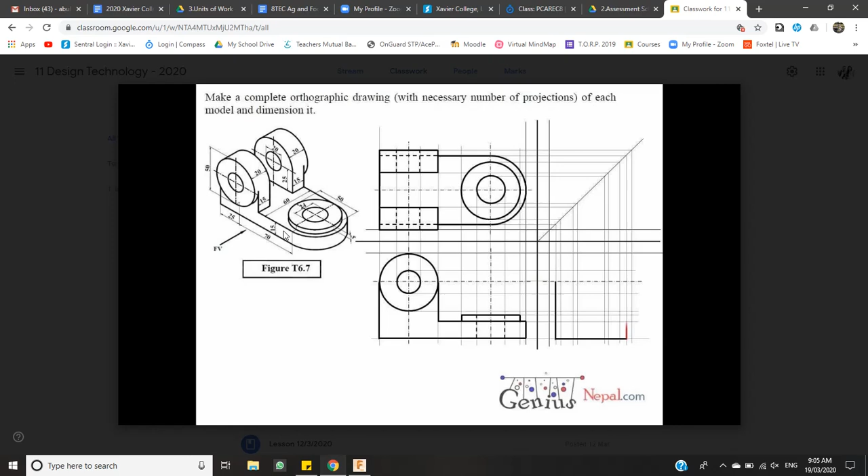So come to Fusion, create a new sketch. It's going to be a base view. Get my rectangle tool. It's going to be 60 tab 125. So you can see I've put the measurements in there. Okay, now we're good to go. So when I look at this object, the first thing I'm going to do is give it its extrusion to make it a platform. So that's a 15 millimeter extrusion. So I come across again, always working with solids, extrude, 15. Okay, so I've got my base shape there to work with.

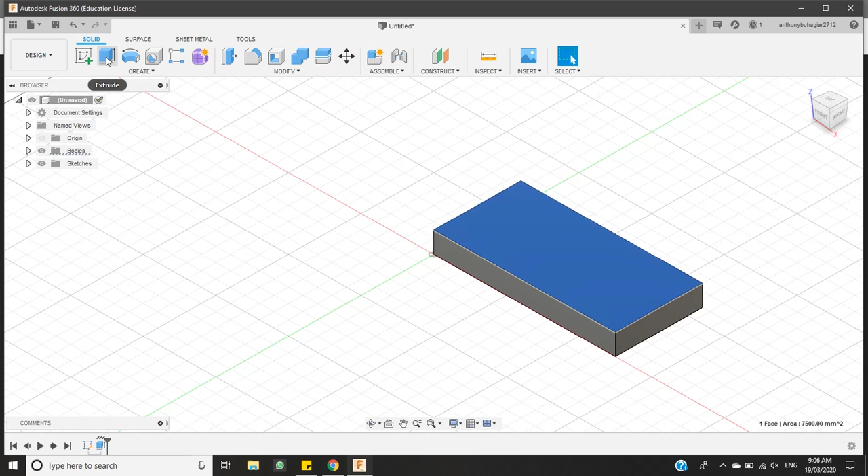And then what I'm going to do straight away is actually add this circular part here. So if I look at it here, this larger circle has a diameter of 50, this smaller circle has a diameter of 24, okay, and I also know that there is a 5 millimeter gap inwards to this point here. So if I have 25 for my radius here plus 5, it means I'm bringing the center point in 30 millimeters from the end. So I'm going to create a new sketch, line, find the middle where it has a triangle, bring it in 30.

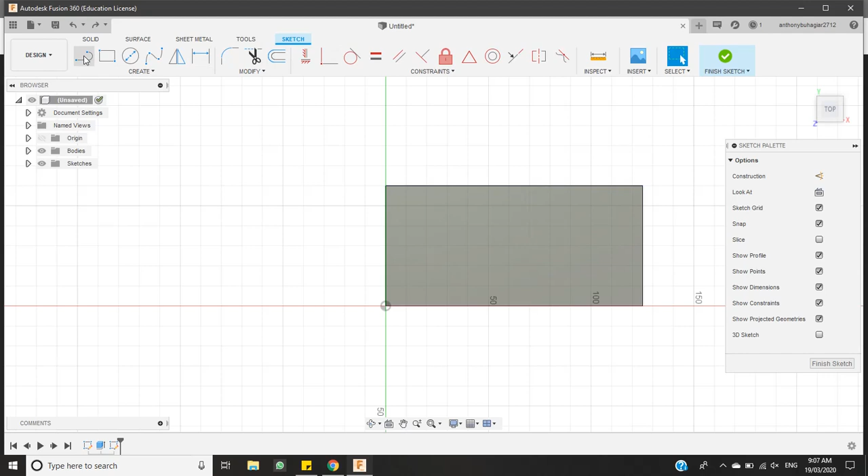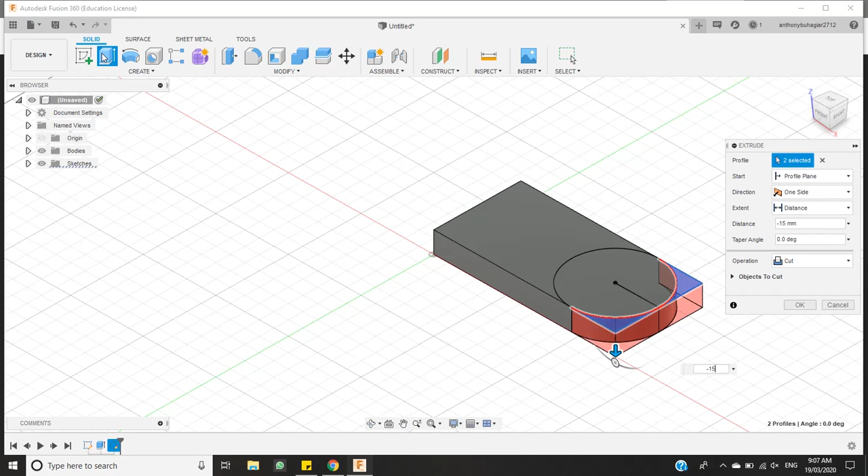I'm going to draw two lines straight away. What I should actually do before I do that is actually draw the curve here. So if I've got a diameter of 60, I'm going to bring it in 30 straight away. Draw my circle, and the first thing I should do actually is get rid of this. So I'm going to do a solid, I'm going to do a negative extrusion to get rid of that, and now I've got this shape here.

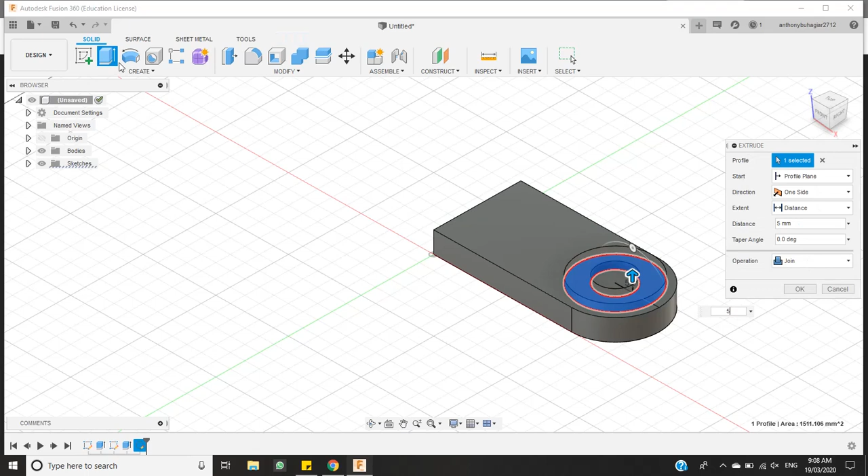And once I've done that, then I'm going to do a new sketch. I'm going to bring it in 30 again. Like I said, the larger circle we were working with had a diameter of 50, so I'll do that. The second one had a diameter of 24, so I'll do that. And then obviously when I look at it, I'm putting a hole through the bottom and I'm raising it up 5 millimeters as well. So what I'm going to do first, I'll do solid, extrude, bring it up 5, press enter, then I'll select this face here, extrude, negative 15, and there we go, we've got that shape there now.

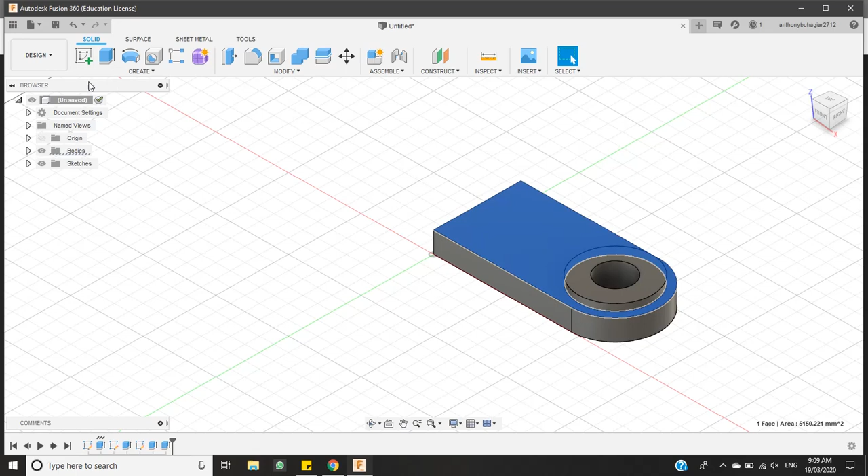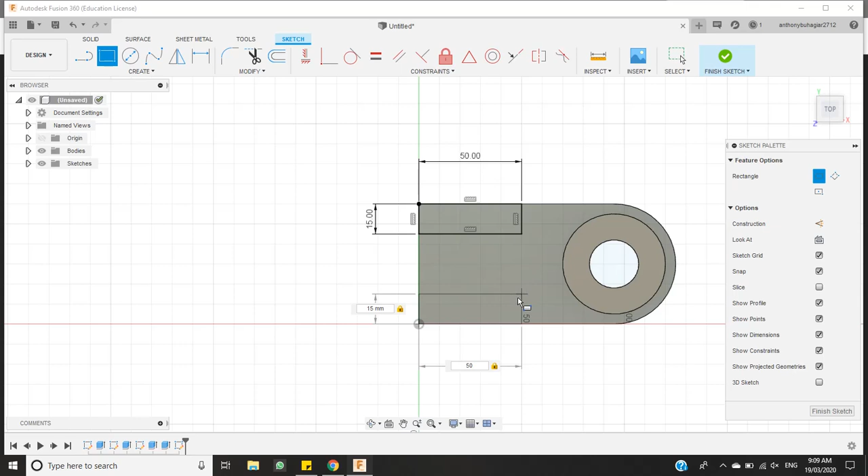Once I've done that, I want to build up these two side parts here. So the first thing I can see is that I've got a diameter of 50 that I'm working with, so that means I need to raise up that section 50 millimeters. Okay, and then obviously it's got a width of 15 as well. So I'm going to do a 15 by 50. So create a new sketch here. So I'm going to do this twice. 15, tab 50. Okay, I'll do it again here. 15, tab 50. Press enter.

Now I need to do an extrusion on both of these, and we're going up 50 as well, like so. And the next thing I want to do is actually round the edges on both of these. So I'm going to create a new sketch, and then I'm going to round the edges. So I know that it's got a diameter of 50. I've done that now. So I'm going to highlight both of these.

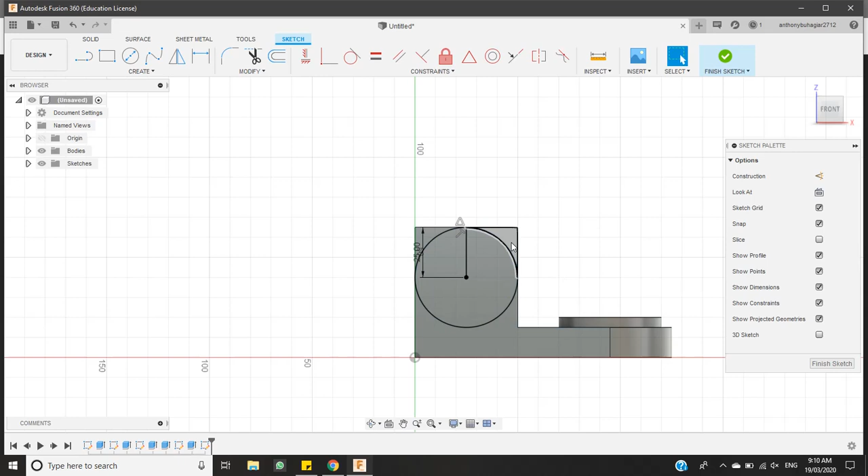Let's try that again. Highlight both of them, and I'm going to do an extrusion. -60. So I've done the circle right now, and now all I need to do is actually do the, I'll show you, these circular parts on the outside.

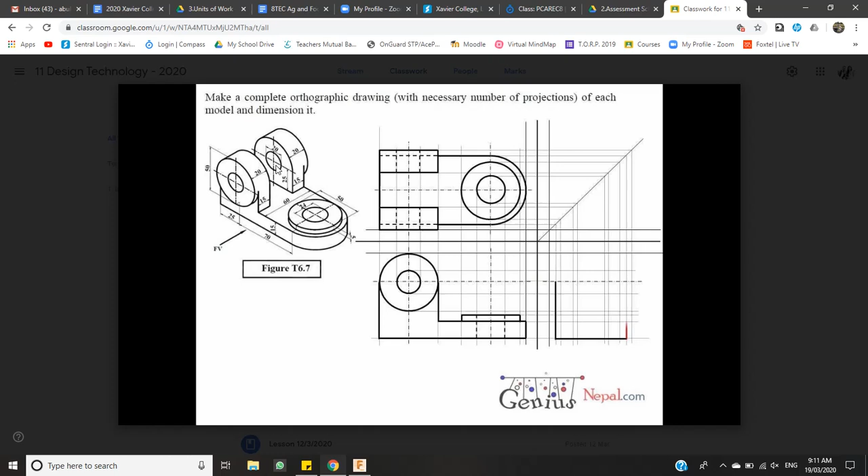So we've got those circles. We want to bring them out another 5 millimeters, so they actually overhang the edge by 5 millimeters, and then we need to push a hole through them as well. So we'll do the 5 millimeters first. So the larger part's 50, the smaller diameter is 20. Fairly straightforward. New sketch.

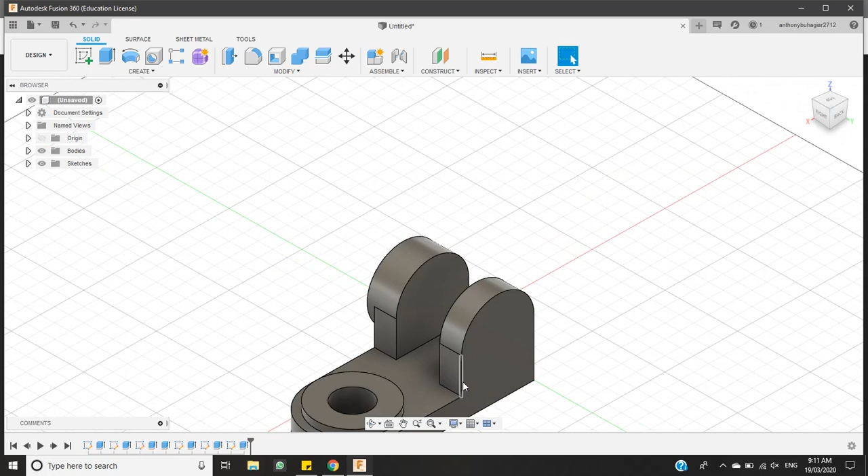So we'll start by doing that. Solid, extrude, 5 millimeters. Press enter. Then I'll do the same thing over here. New sketch. Use the circle tool. Find the middle. Extrude it out 50 to another 5 millimeter extrusion.

So we've got that. And then the last thing that we need to do is to actually put a hole through it. So another sketch. Find the midpoint, 20, and then we can use that to do our final extrusion. So if I look at it, I'm going to go -60. No, actually I need to go -70 because we've added another 10 millimeters to it.

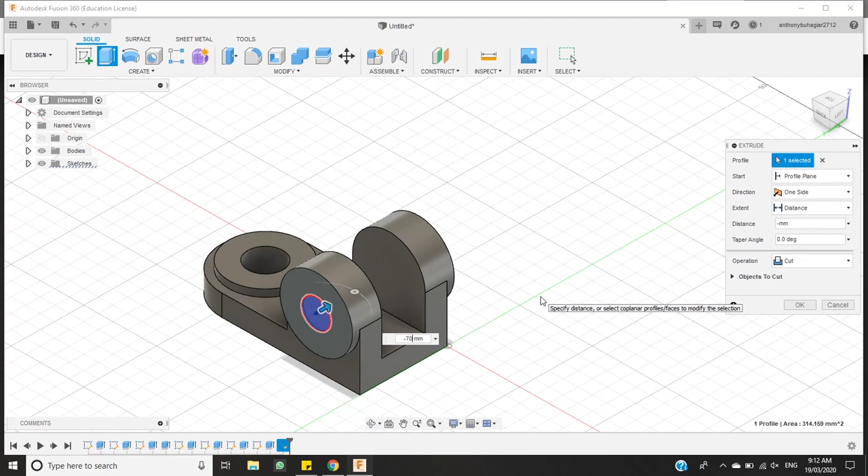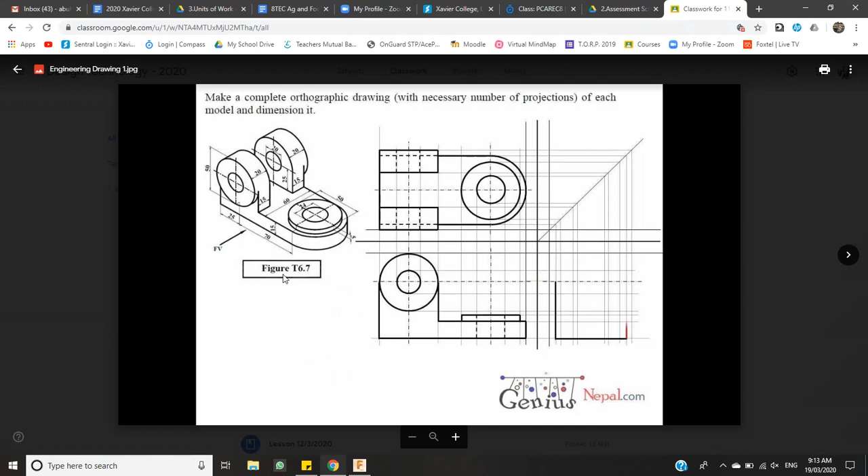And there we have that final shape. And if we put it in free orbit, that's exactly what we're looking for. Alright, so that's our first object that we needed to do, figure T6.7. We'll move on to the second one now, slightly more difficult.

So the other thing I'm going to do is, because it's got such an intricate design on each side, I'm actually going to build it in half and then mirror it at the end so that I can build the second half of it. So the basic size that I'm working with for this project is obviously going to be 120 millimeters off the ground, and then it comes in 25 to the midpoint of that circle. So if I do 125 plus 40, it gives me 165. So 165 by 120 in the side view.

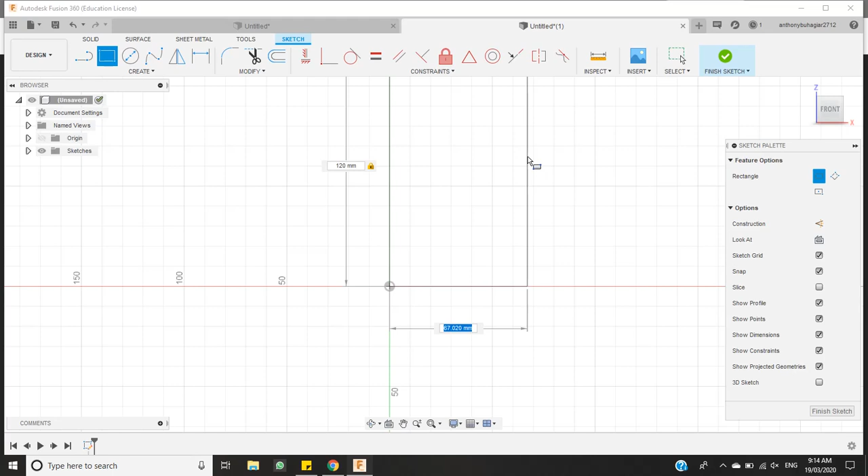Let's try that. So 120, tab, 165. Okay, so this is the basic shape that we're working with. Now what I'm going to start doing is just start drawing components. So first thing I'm going to draw is this 65 by 18 base.

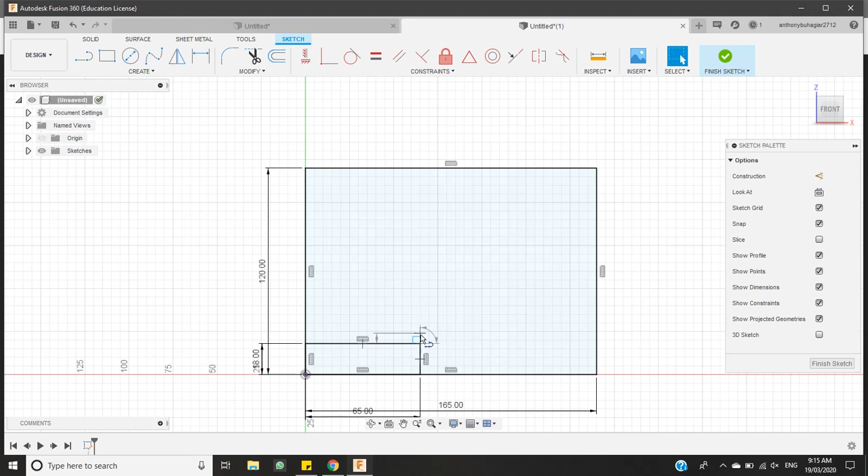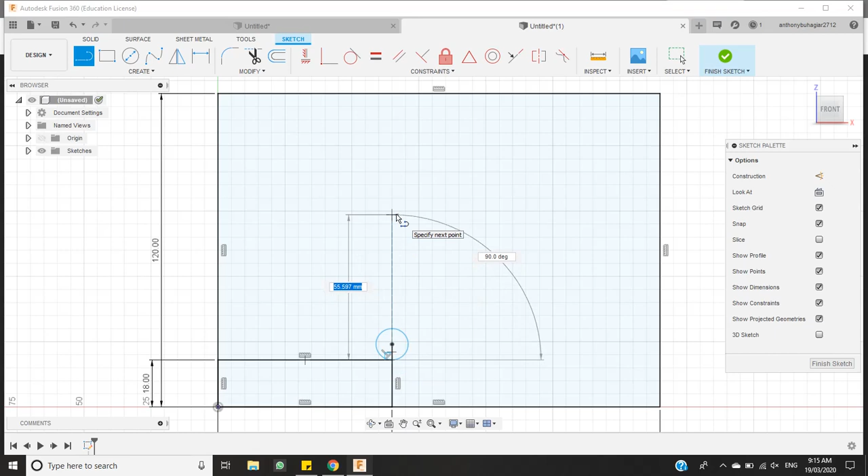Now, the next thing that we need to draw is this big radius of 18. And it is coming up 53 millimeters from this point here. So what I'm going to do straight away is draw a line straight up 53, and actually I'll make it a construction line so I don't need to delete it. So this gives me some height to work with.

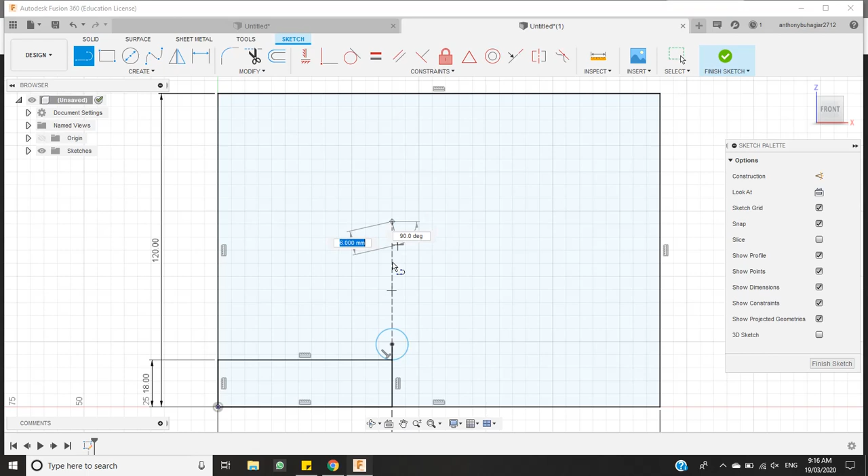Then the next thing we need to do is this radius of 18 needs to somehow line up with this radius of 6. So the first thing I'm going to do is, if it's got a radius of 18, I want to know in this line here how low my center point is going to be. So if I just put a line there measured to 18, I've got this point here that tells me where the radius is going to be. Then all I'm going to do is bring a line in 18 millimeters again.

Okay. And now I know where my circle is going to start from. So I'm going to turn that into a construction line. I'm going to turn this into a construction line as well. And I can use that. That's actually not correct. Let me back up a second. So let's follow the same process, but this time what I'll do is I'll draw the 53.

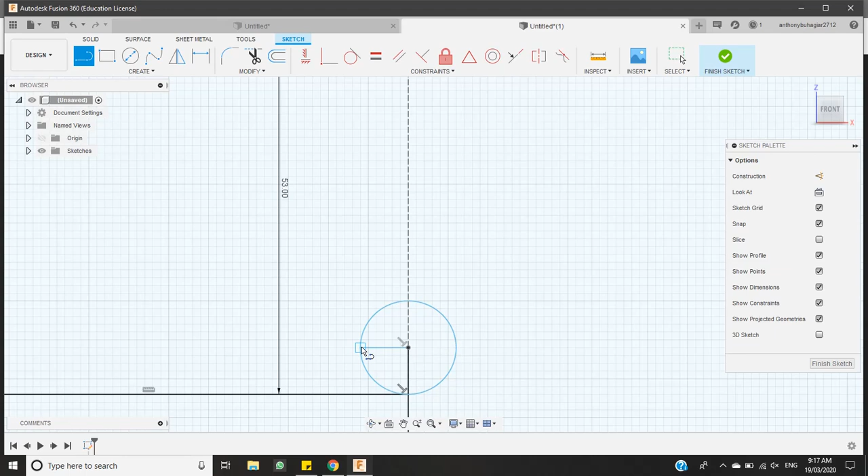So this is the widest part of my circle. Okay, it's got a radius of 6. If I'm coming from there, I'm drawing a line up. I'm going to do 53, bring it up to the same point. 53 minus 6 gives me 47, so I know that's correct.

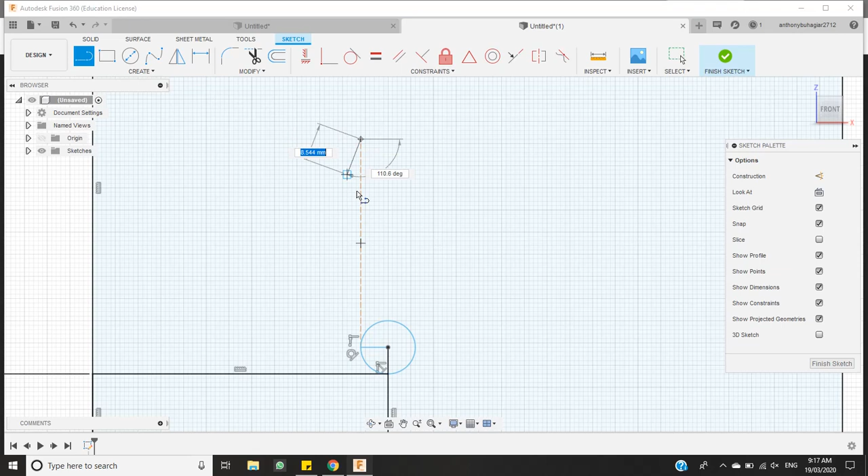Now that I've got that, let me delete this line. Let me delete this line. Turn this line into a construction line. I'm going to draw a line straight down of 18. I'm going to draw a line across of 18. Okay. Turn both of these into construction lines.

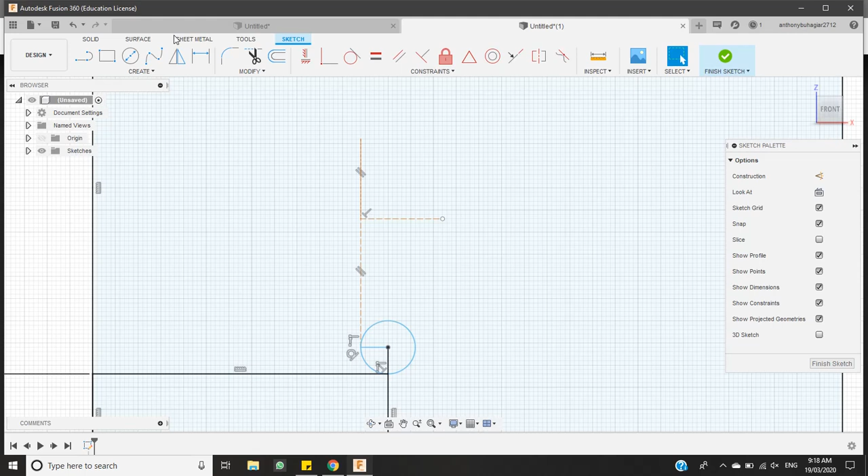Because all I want to do with both of those lines is get a bearing for where this larger circle needs to begin. Now the reason for that is because if we look back at our drawing, this small radius and this large radius need to line up in a straight line. Okay, so I've done that. That is good. So now I can get my pencil tool, draw a line from here to there, and that works. So as you can see, we've got that kind of shape there.

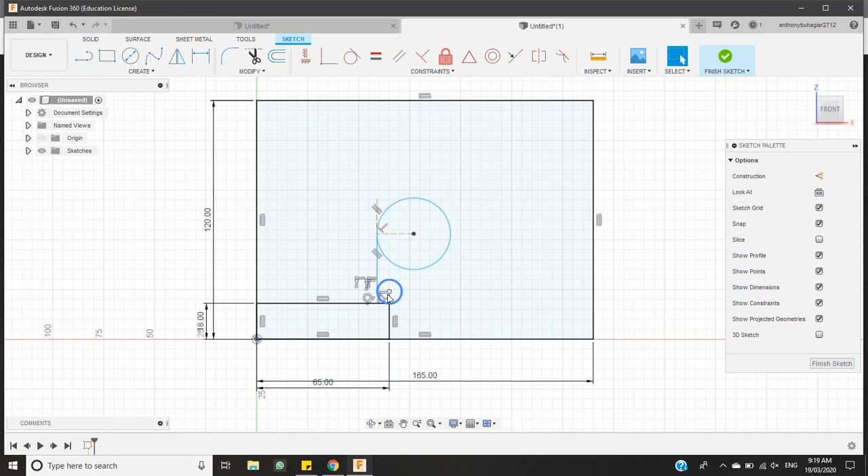The next thing that we need to do is draw this other shape here that is 12 mil thicker all the way around than this first one. So the way that we're going to do that is by using these same center points for our circles, and all I'm going to do is draw a line across 12 mil there, and draw a line across from here so that it's 12 mil as well.

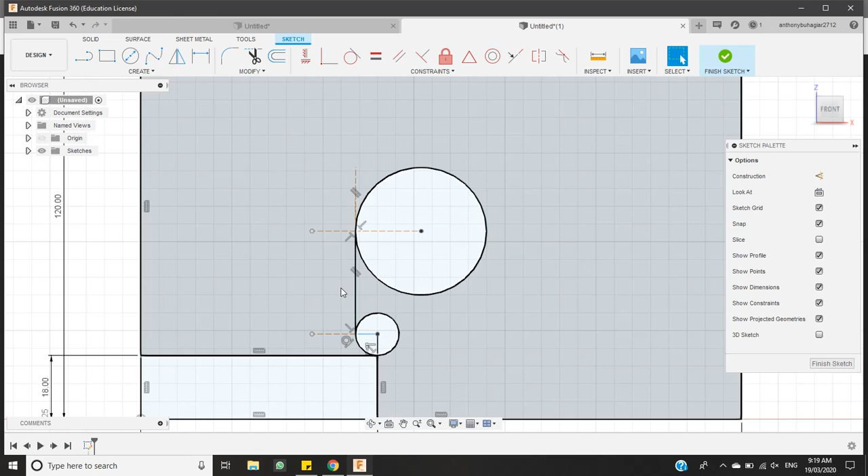Okay, again we're going to use these as construction lines, and what you're actually going to start seeing is that there's going to be a lot of circles and lines and shapes on this drawing that you need to keep there till we do our final selection for extrusion. So again, from the center point, I'm drawing a circle right out, but now I know that there's a curve that is 12 millimeters wider than on the other side.

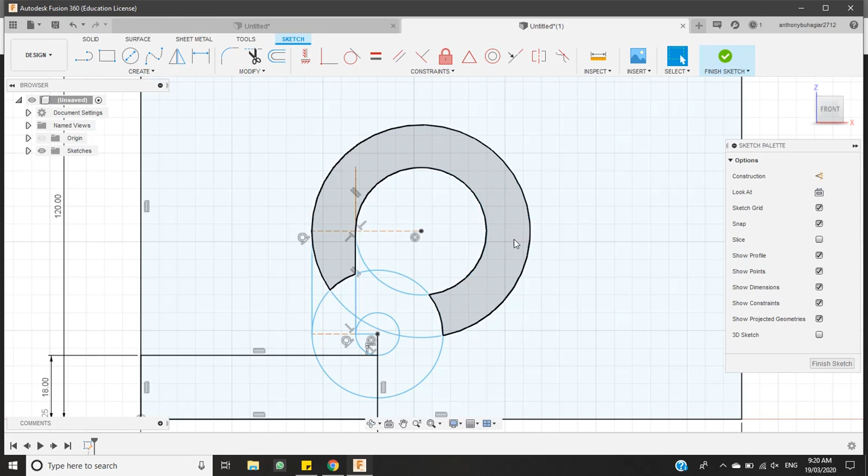So I press escape, and then I can use this to produce that shape that I require. So what I can see now is I've got this shape here, okay, and then I've got this curve, all these little parts that I'll add together to produce the shape that I require. Now that we've done that, we need to continue building on from here.

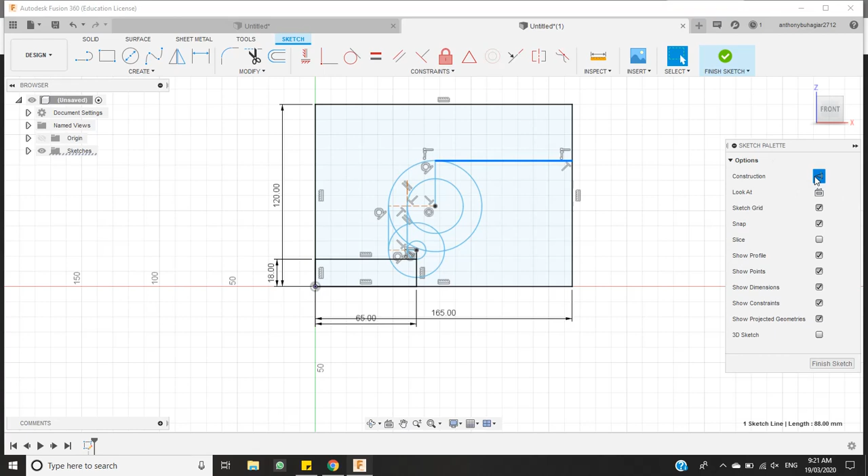So we've done this curve. Now we've made it so that it keeps curving around. Now we need to straighten it off, and we need to know where it ends. And we find out that it ends halfway at 125 millimeters across. So what we're going to do from here is I'm going to draw a line firstly to the top of this circle here. Now if I draw it all the way across here, what I can then do, turn it into a construction line again, both of them, so they're not interfering.

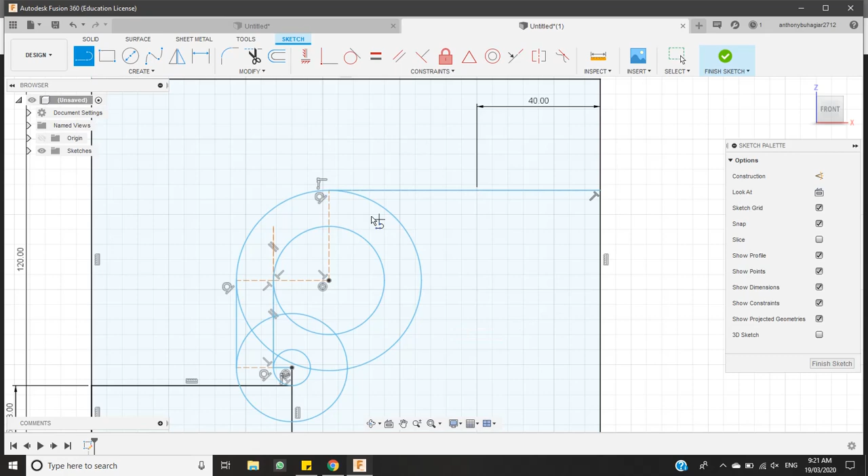But now I'm going to draw another line across, so we know that this is 165. We want to minus 40, so that it becomes 125. So now I know that if I zoom in, this is where that section of the drawing should end. Now it's frozen a little bit, but did that work? Let me try that again. Okay, we've got that there.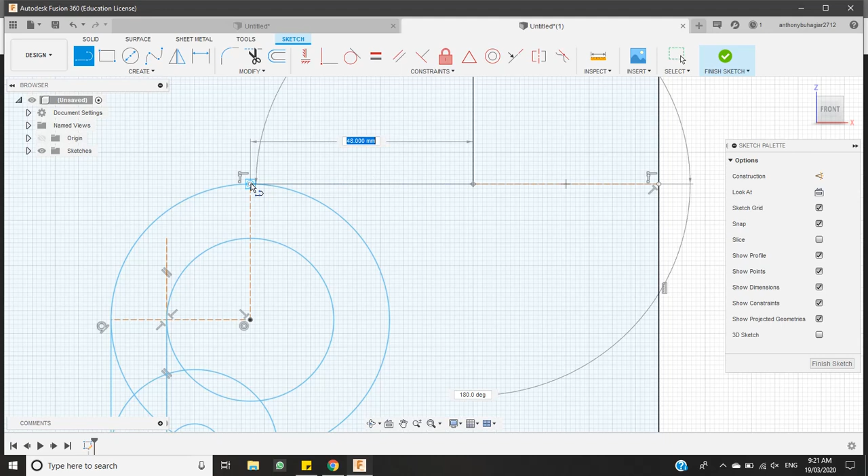So let me just delete that first. So now we can see it. I'll delete that too. No, I won't. Control Z. Turn that into construction. And this becomes our actual drawing there. I'll do the same thing over here. Now we've got that shape that we need to work with.

And the next thing we're going to do is we need to draw, obviously, this big shape over here. Now, obviously at the bottom here, we've got this cylinder. What I'm going to do for now is I'm just going to leave it because I don't really want to worry about that right now. I'm just going to draw this part upwards from here. So this circle comes in 80 millimeters. So the next thing that I'm going to do, I'm going to bring a line in 80 millimeters. I'm going to drop it down, and for now I'm going to leave that as it is.

Now the last thing that I want to do before I do an extrusion is this spine that's over here. Now it seems quite easy, but once we do these two curves, it'll make it a lot easier for us. But we've got to get through a 12 millimeter radius and a 42 millimeter radius. So let's do the 12 mil radius first. So obviously it comes up to the top here. All I'm going to do is bring the line in 12 mil.

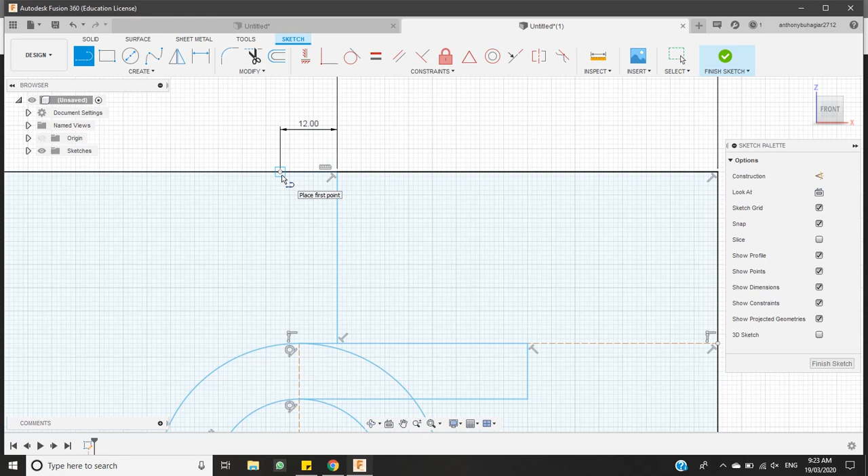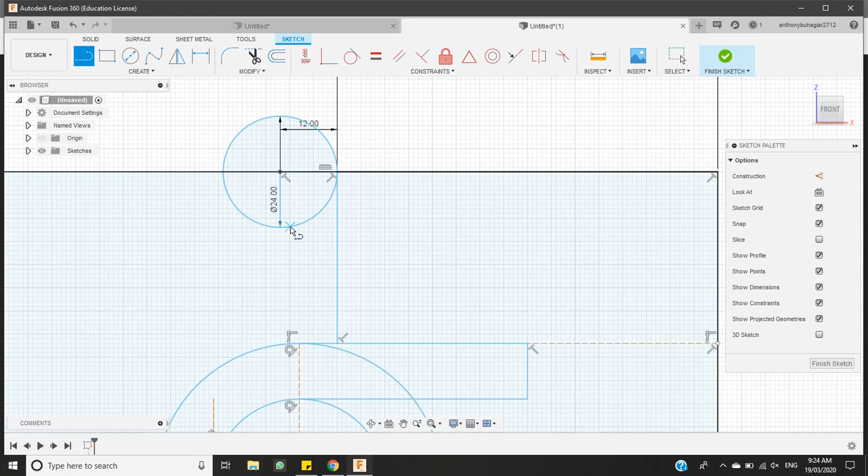Now what do I want to do? So I want the curve to be the bottom part of a circle. So what I'm actually going to do, I want my circle to sit on this point here, because I want to get that... what I need is actually this part of the curve right there. So I'm going to use that part of the curve as I require. I'm going to draw a line straight down here just to get the right intersecting point now.

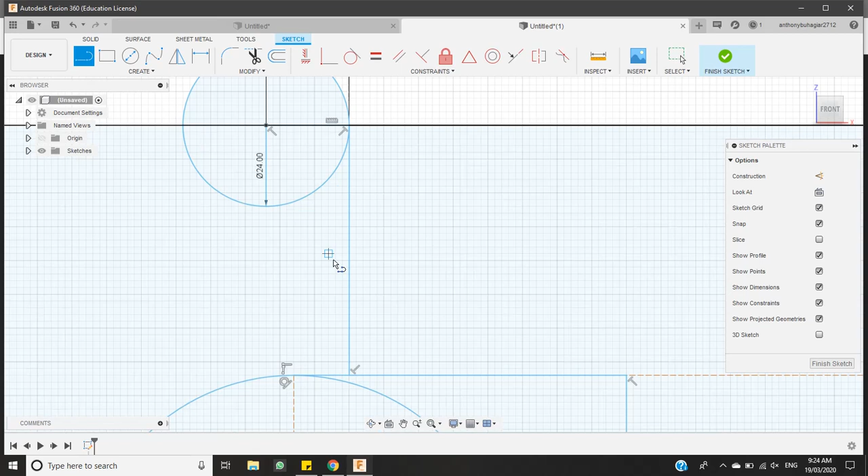So I've got this part done. Let's just have a look at our drawing again. Now we need to produce this second part of the curve, and what we also need to now think about is where they intersect. So from this same point, I now need to have a radius of 42. So I'm just going to draw another line straight down. That's going to be 24.

That wasn't what I wanted. Let's draw a line straight down from this point here. Sorry, 42 times 2 is 84. Now this is quite a big line. So first thing I'm going to do is turn that into a construction line. Get rid of the measurement just to clear out my drawing. And now I need to draw a circle all the way up to that point there.

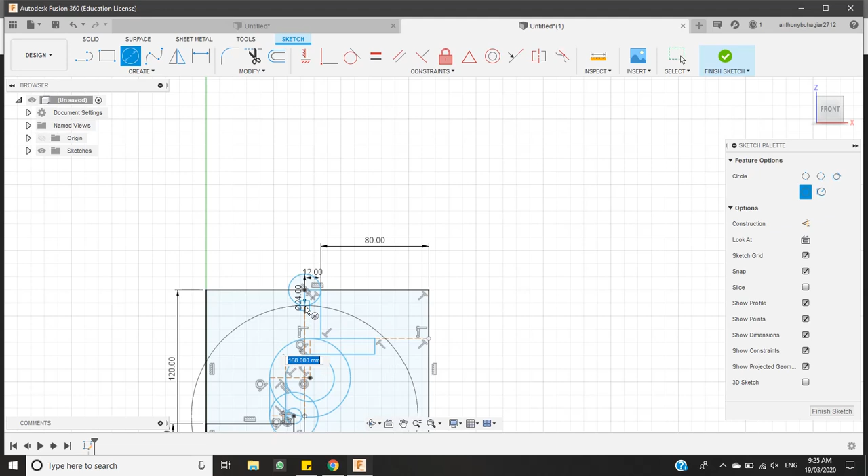That's taking a little bit of time to load. It's alright. Okay.

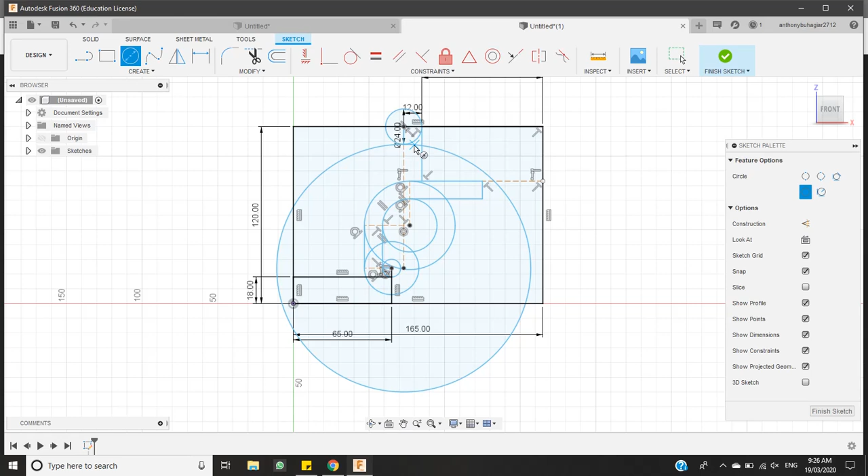Now, as you can see, we've now got this curved shape here, but we can't use that completely because we need to turn it into a straight line. So if you have a look here, we've got a measurement here of 24, and then at that point, when we come across, this curve ends. So what we're going to do now is we're going to measure down from this point, draw a line down 24, and we see where that ends, and then we need to draw a line straight across so that it intersects with our circle.

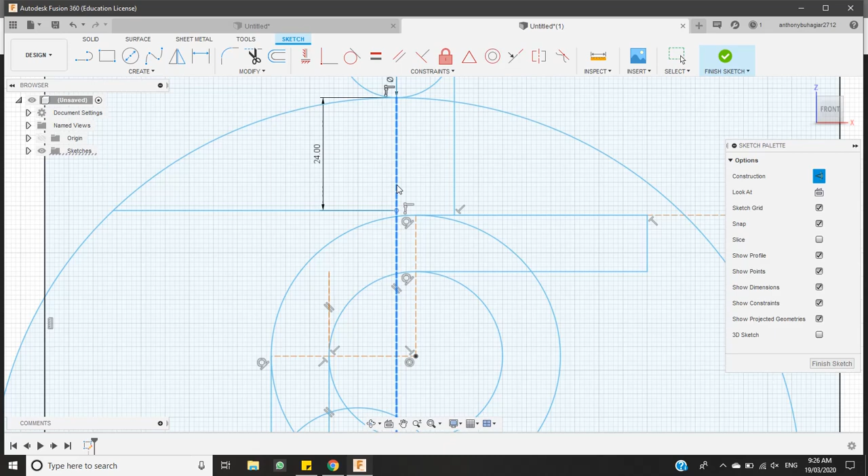Okay, now I'm going to delete that line. I'll delete that line too. But now we've got an intersecting point here. For some reason that doesn't look right. A radius of 42. Just bear with me for a second, guys. A radius of 12. That's a radius of 12, which means that's going to be 24. That's a radius of 12. It's a radius of 84. That is correct.

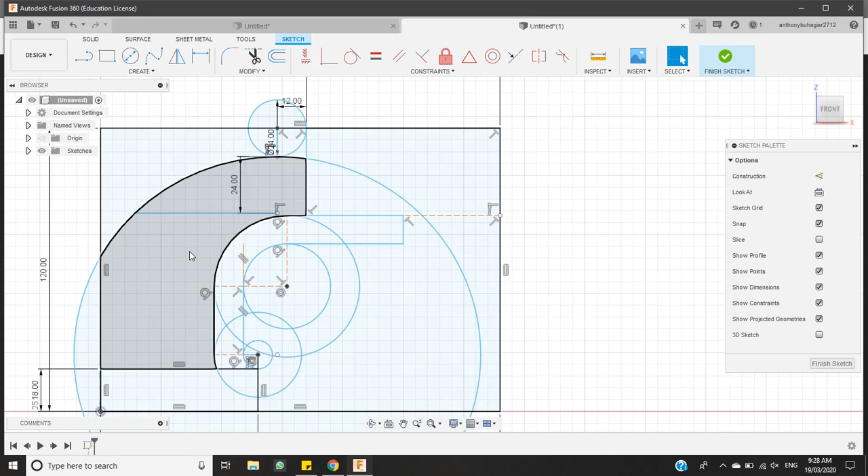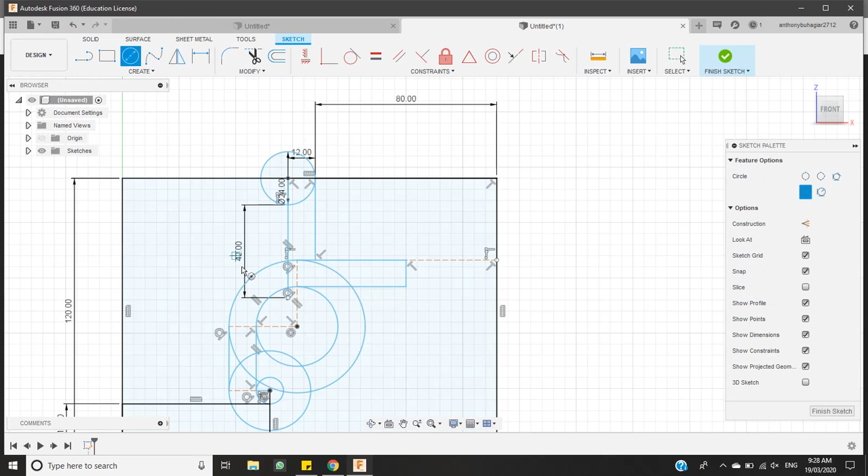Because this circle's too big. Just bear with me, guys. Let me try that again. Let me get rid of that. I want this circle to have a 42. Let's draw a radius of 42. Let's try that again. Okay. Create our circle. Done. Now loads.

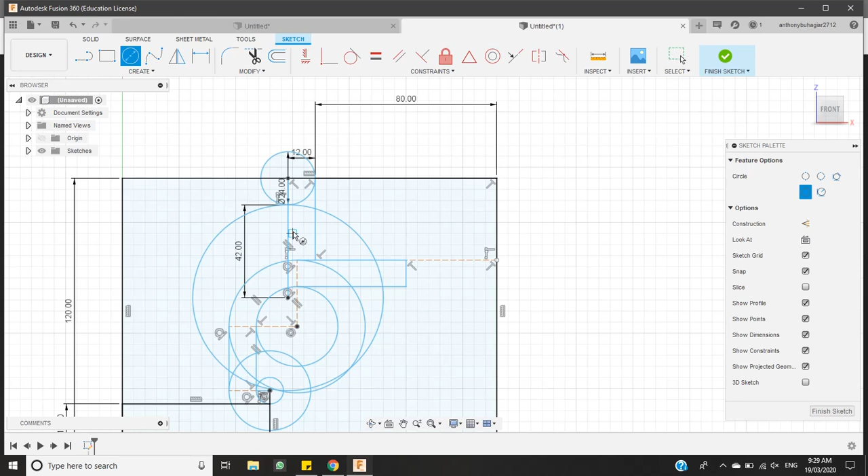Like I said before, let's draw a line down now, 24, and like I said, you're just going to see that this thing is going to have so many lines that you've somehow got to keep control of it yourself. So you just got to be very aware of what you're doing. Now again, the reason why I draw that line across, because that's our measurement there, and then from this point here we draw a line straight across like that.

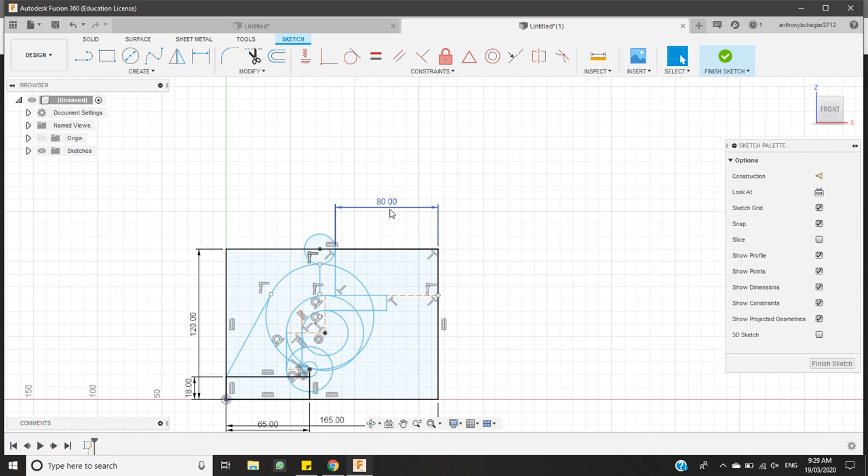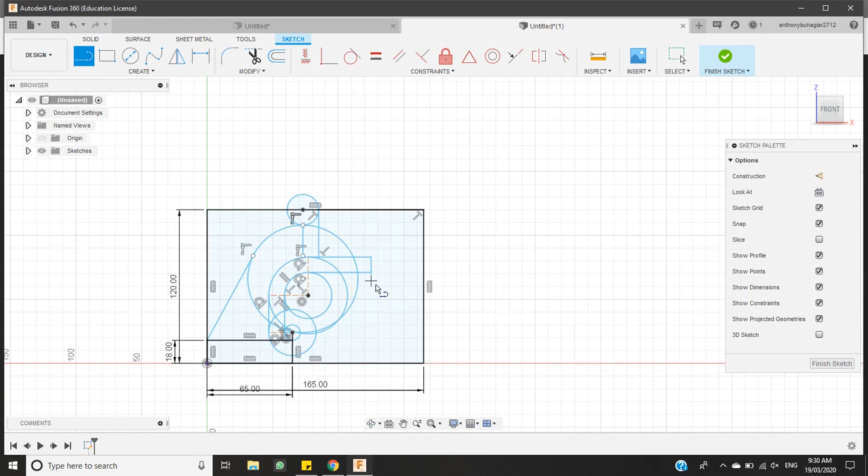Now there's obviously some lines and measurements that we can delete to clear up our drawing, but not a whole lot. You need to be careful because some of the lines you need for our extrusion, so be careful not to delete any of the circles or things like that. The last thing that we need to do is, even though it's got this part at the bottom here, I'm just going to build this cylinder at first from the top there and then add on to that afterwards. So I'm just going to draw a line straight across from here.

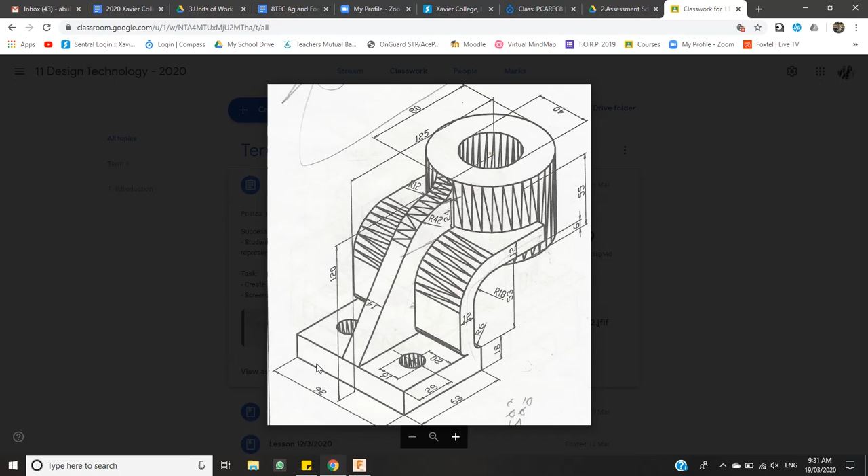Now when I do my extrusion, what I'm actually going to do is I'm going to extrude from the middle. So I'm going to do a 7mm extrusion of this shape here, and then I'm going to do a much larger extrusion, so 92 divided by 2, a 46mm extrusion of the front part. So how we do that, I select all of these parts from the spine like that. I then do solid, extrude 7, I press enter.

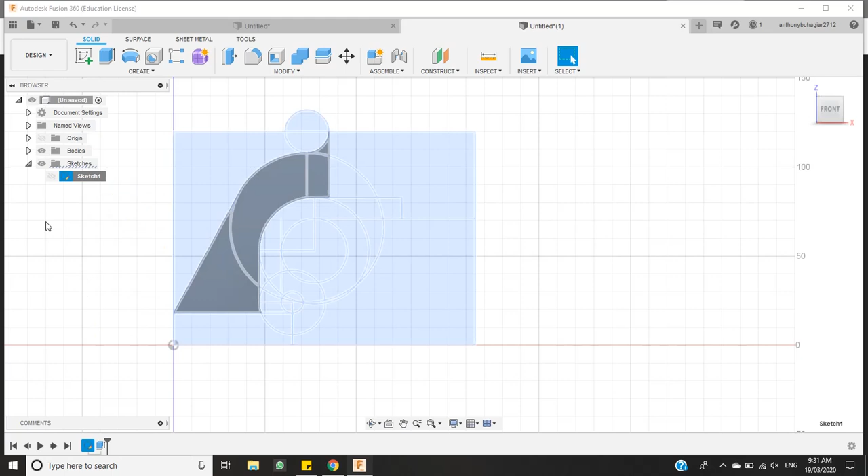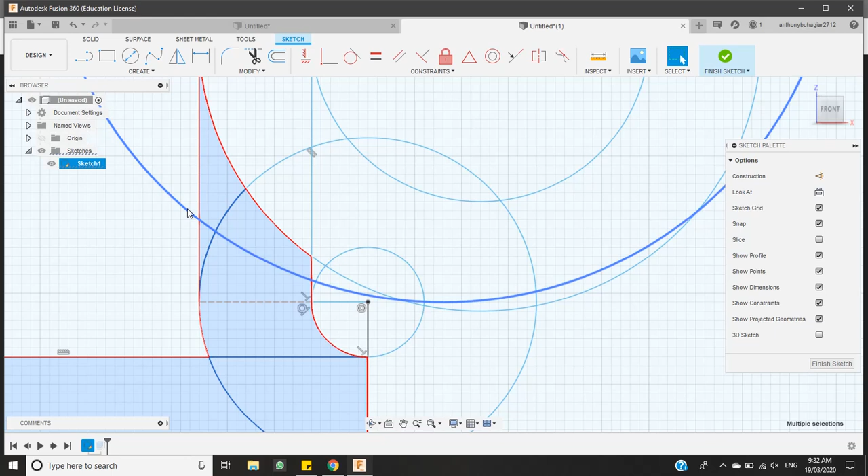Now it looks like everything's gone, but if I come back to sketches, come back to my initial sketch, what you should be able to do is actually edit it again. Edit that sketch. So now I've already selected this part here. Now what I'm going to do is select these other components. Now just be careful with what you're selecting. You want to make sure that you're selecting all of these components. And when I just look at the drawing again, yep, I've got all of that.

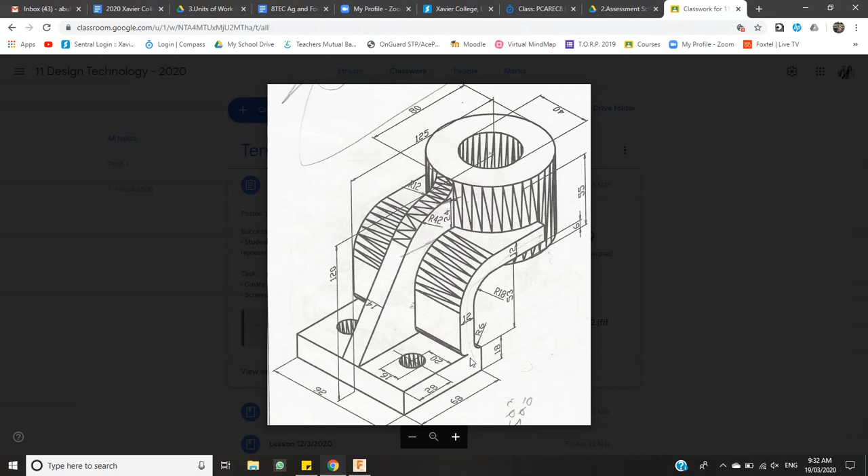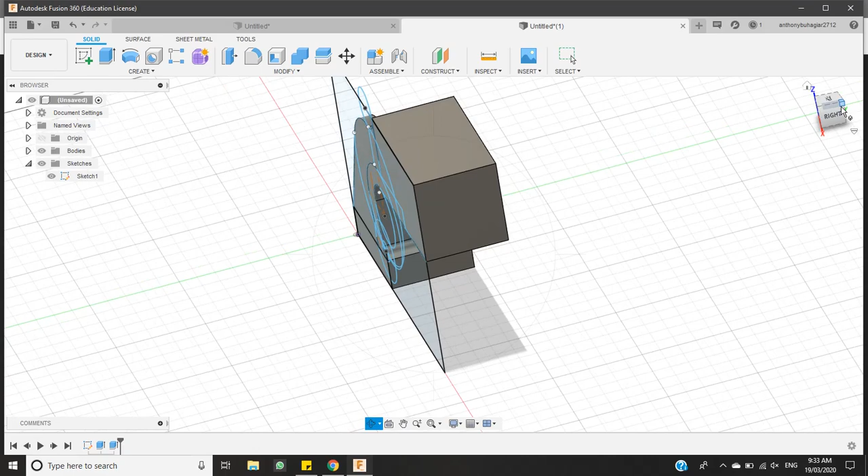And also what I need to select is this over here too. So I'm going to select this cylinder, this shape here. And we're going to extrude that 92 divided by 2, which is 46. Solid, extrude 46. Press enter. So what you can see now is that we've got this spine shape that we can now work with.

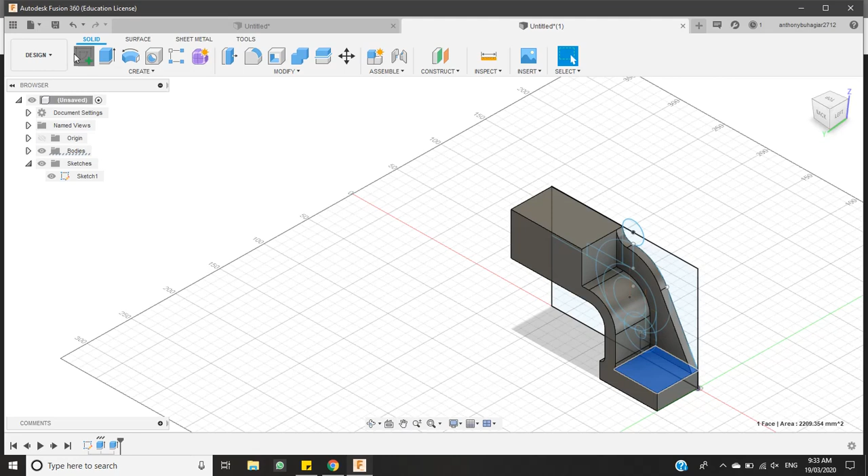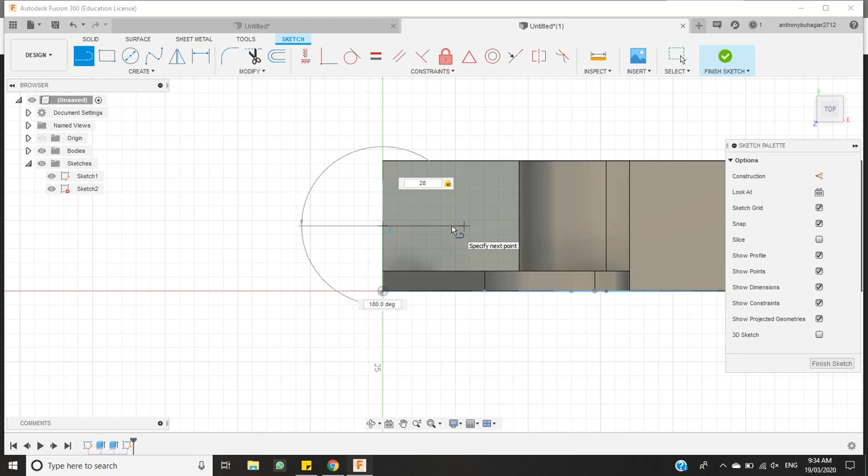So the first thing I'm going to do, if I look at this drawing here, is I'm going to draw this circle in the middle. So I know that it's 28 from the outside, 20 in from the wall, and it's a 16mm diameter. So let's do a new sketch. Just looking at it again, 28 from the back, 20 in from the wall. So 20, enter. Sure it was that. Yep. 28 from the back.

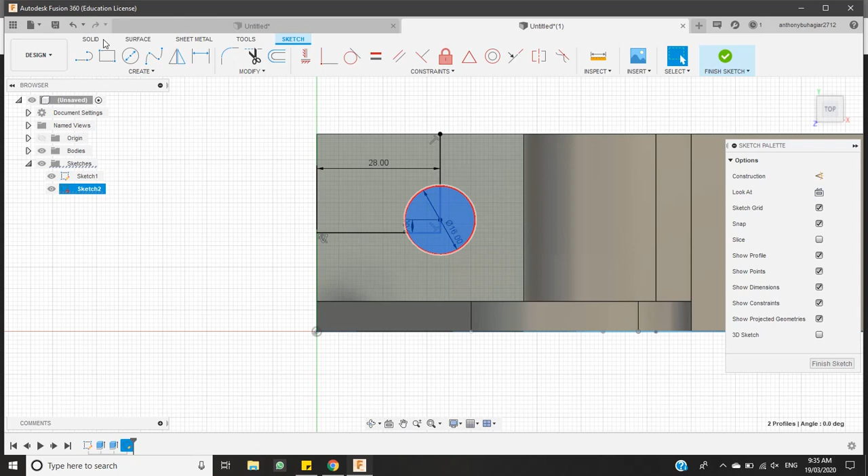So that's 23, so I need to bring it in 3 millimeters. Now I've got the location I need, and it's a 16 millimeter diameter. Press enter, and then control, let's do a negative extrusion. It's going to be minus - how thick was the base? Base was 18, so go minus 18.

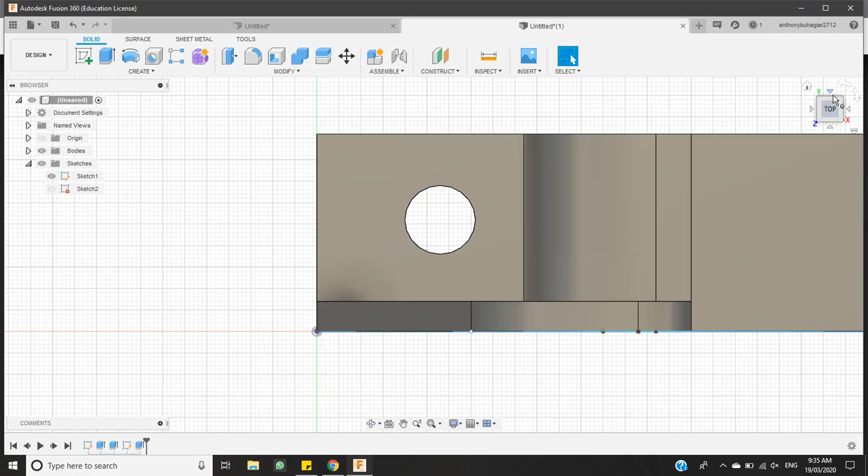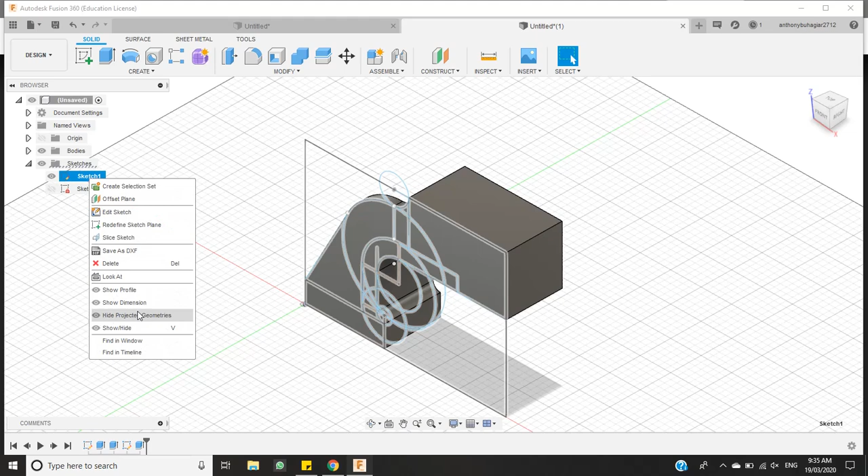Now it's got a hole in it, so we know that it's being done correctly. So, how can I hide this sketch? There we go.

So now, for me, the last thing we need to do is actually produce this semicircle. So I'm going to select the top face, and I want to draw onto it. We're drawing a cylinder that has a diameter of 80. So straight away we know where it begins. So I want to go find the midpoint. I'm going to draw a construction line all the way across it.

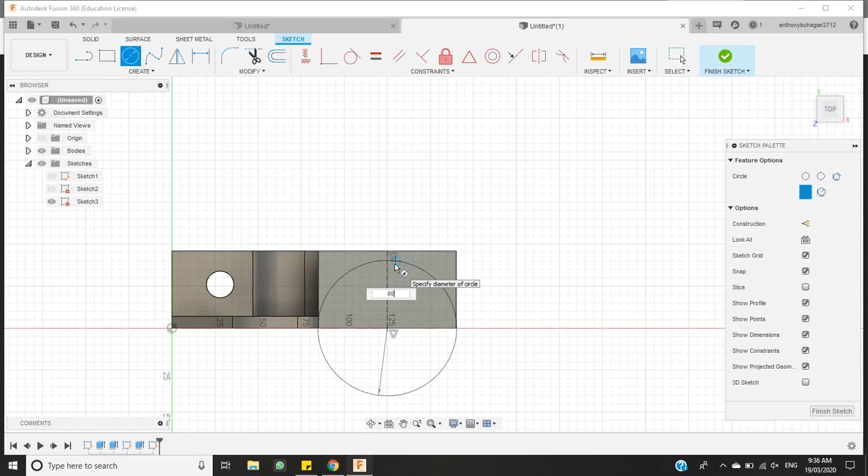What we're going to do is mirror this part of the object onto the other side. So what I want is to draw a circle that is 80 millimeters from the center. So I've done that, and now I want to actually get this part of it.

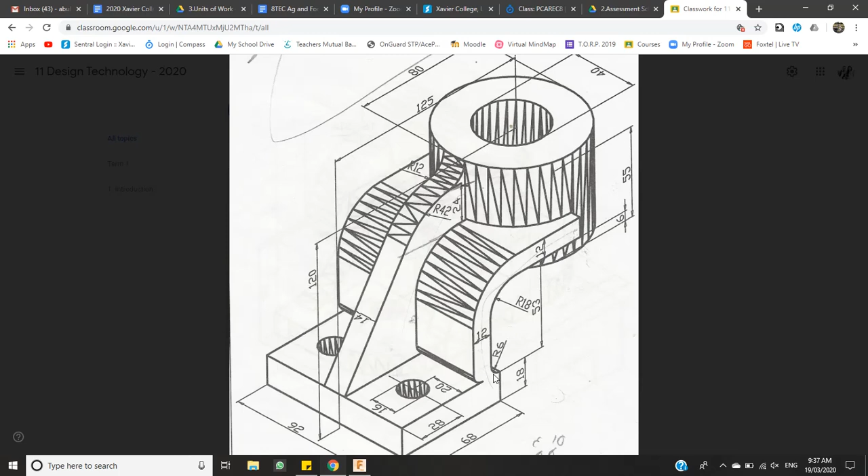I want to drop it down. So if I look at my drawing here, I need to drop it down so that it touches my thing there. So let's just find the right view to be working with. Not that one, we'll rotate it. Actually, that will be the right one.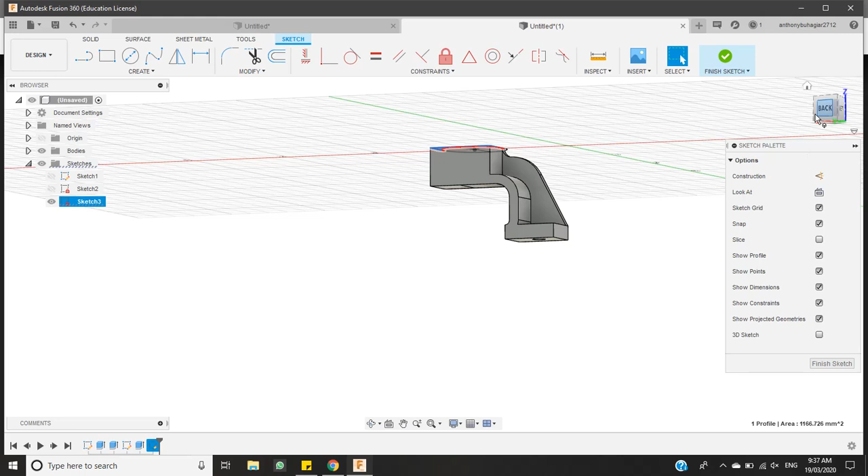So now we're going to do a negative extrusion, and we're only going to extrude it - let's go to 37, because that might be exactly, yep, there we go. Press enter. Now it looks like that, which actually doesn't replicate what we need here.

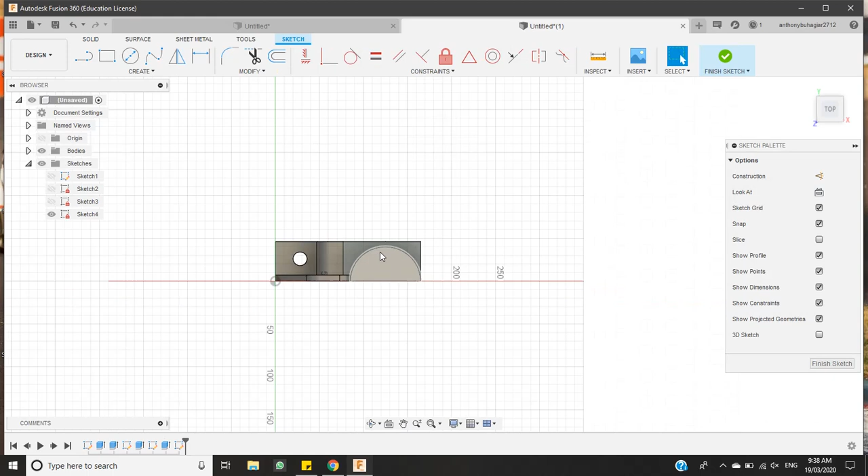So because we've got all this extra stuff here, what we're going to do now is draw another sketch from here. Get a line, find the midpoint of the circle, draw a line across, highlight that, solid, extrude, minus 12. Okay, now that's more like it.

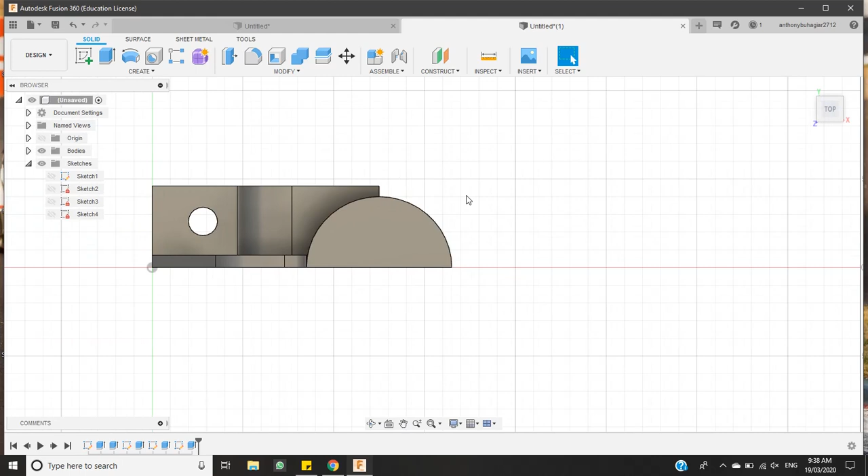That is what our object should look like now. Okay, so that's been done. The last thing that we need to do now is create the hole, or half a hole, and then mirror it.

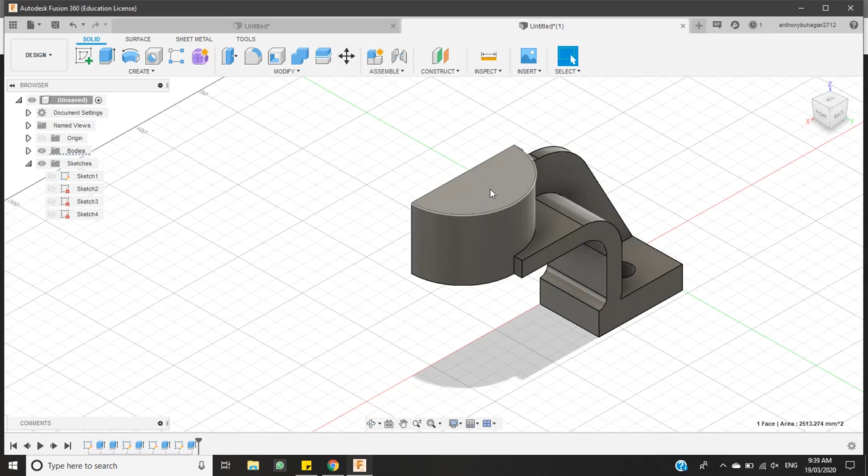This small hole has a diameter of 40 millimeters. So we're going to create a new sketch here from the midpoint. 40, select it, solid, extrude it. We're going to do a negative extrusion. Okay, so now that's become a semicircle.

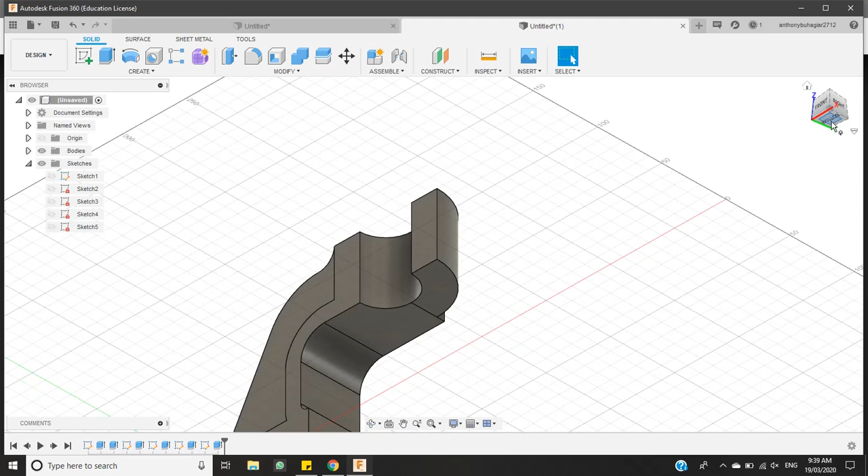And finally, the last thing we need to do is add an extra 6 millimeters onto the bottom of this lip. So it's quite a simple task. I'm going to look at it from the bottom. Just to make sure there's no issues. Yep, there's no issues there.

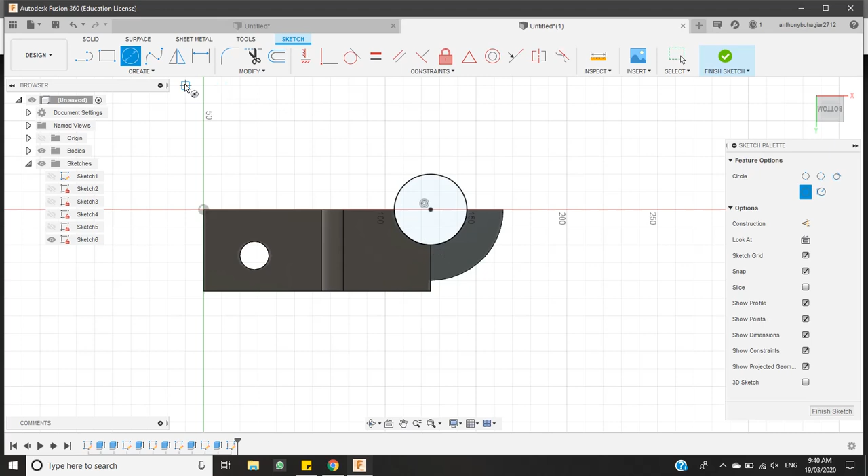So now I want to look at it from the bottom. I want to create a new sketch over here. What we're going to do is find the midpoint here. We're going to create 2 circles. 1, 2. Okay, then all we need to do is actually just select both of them.

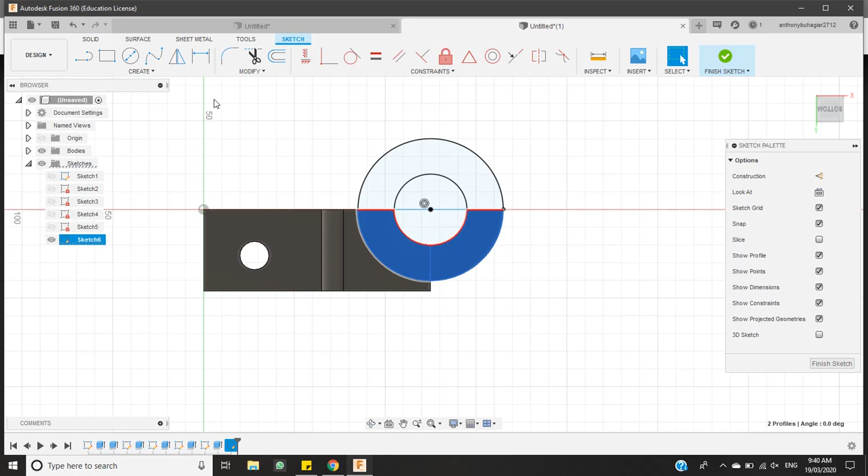Oh, not that, let's draw a line across it maybe. Yeah, that's better. Select that, select that, solid, extrude 6. And we've actually created that shape there now.

So if we were to look at this, this now replicates that shape that we've just designed, but that's not finished. So once we've done all of that, we need to mirror it. So if we come here to...

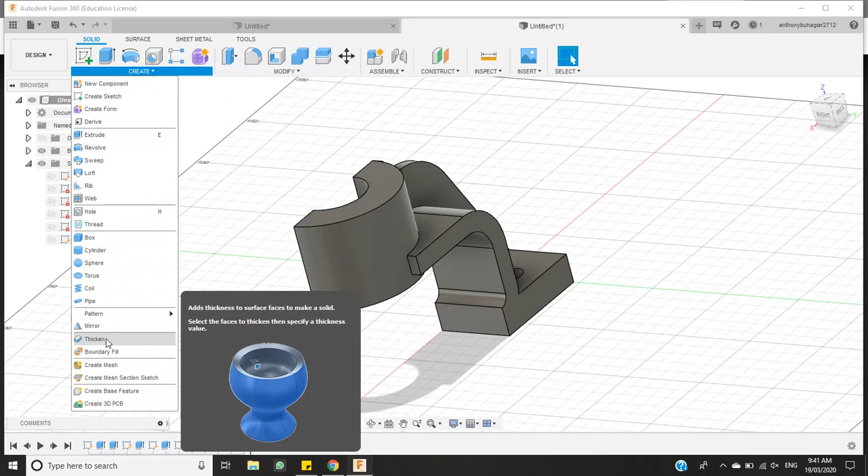Modify - where is it? Where's my mirror? Here we go, to create a mirror, that's what we want to do. Asks us what object we want to select. So the bodies, I'm just selecting both those bodies. Then it asks me for a plane that I want to mirror from, and I want to mirror from this plane right here.

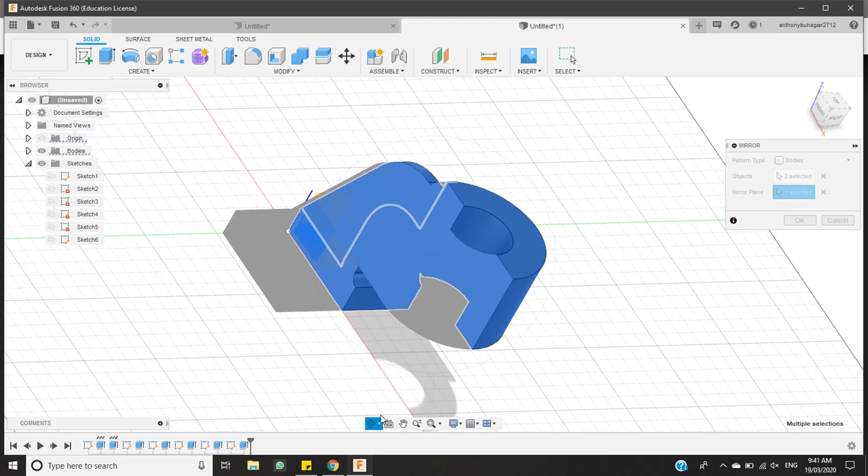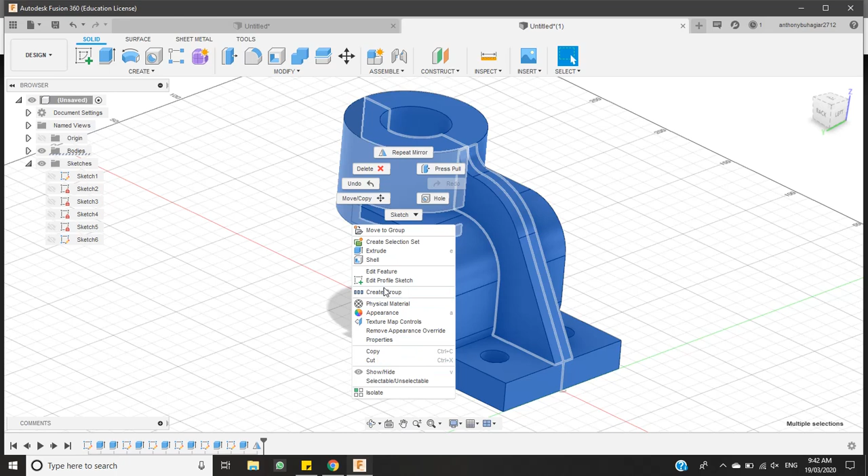And what you can see already is that it's actually produced a silhouette of where it's going to model. If I press OK to that mirror, then all of a sudden I've created that object. What you can then do, I'm pretty sure if you select everything, is we should be able to join it. Combine them both, and that becomes the one object that we need.